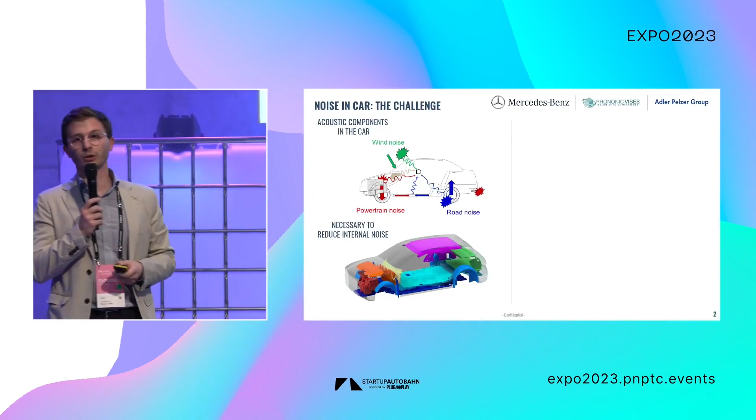So we talk to you about meta design. Meta design is, as written there, the next level of acoustic performance in the car industry. What do we mean by that? Of course, noise is an issue that exists in the car, and normally you have different sources, and different parts that address this noise.

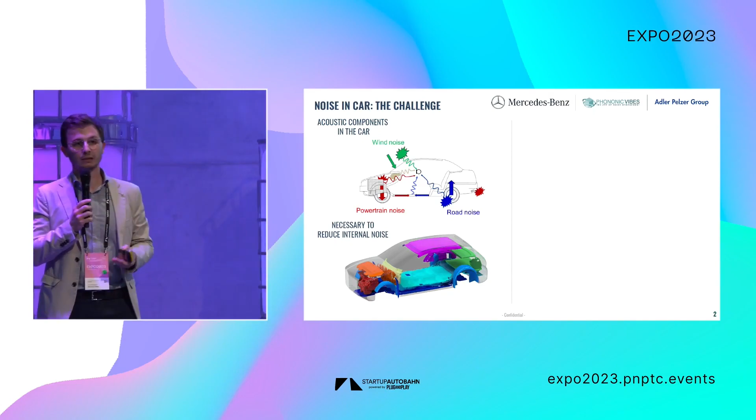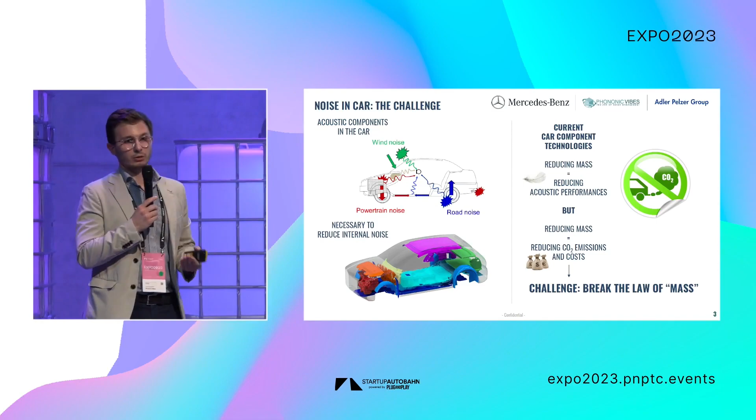Some of these parts we touch, like the carpet, for example, with our feet, but there are others hidden inside. Normally, how it works is that you have some materials, and in order to have the car efficient and to save and go for less CO2 emission, you need to reduce the mass of these components. But if you reduce the mass, what happens is that you also reduce the performance.

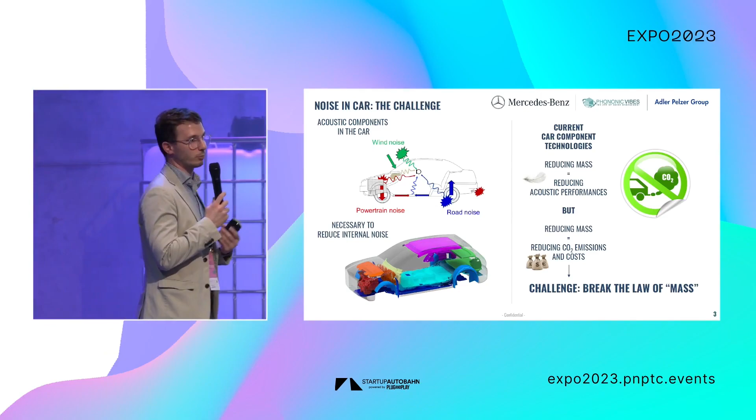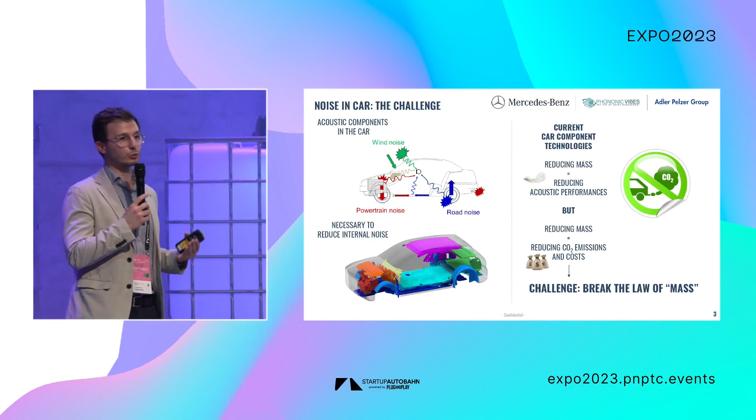So our challenge in this project was to be able to reduce the mass and at the same time have the same acoustic performance, and therefore to break what is well known in physics as the mass law. We did this with our technology, which is metamaterials. Meta means beyond in Greek, so we go beyond, which means that we work with shapes and not with the raw material itself.

You can see there some strange 3D printed stuff. You can imagine when we started the project how strange it was, these blocks in the car. But then we industrialized it.

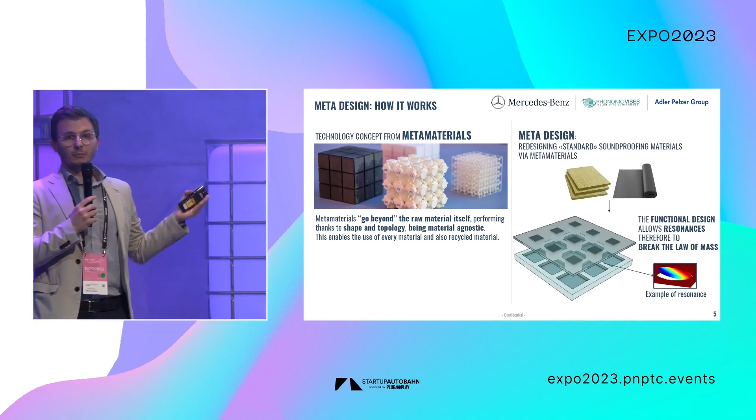The core technology is that there are some resonances. You can see that there is a periodic pattern in 3 dimensions that takes the wave and scatters it somehow. So it's everything about the shape and the topology, not about the material itself—we can use whatever material. So we combine the already existing material in the car industry and give it some additional resonances.

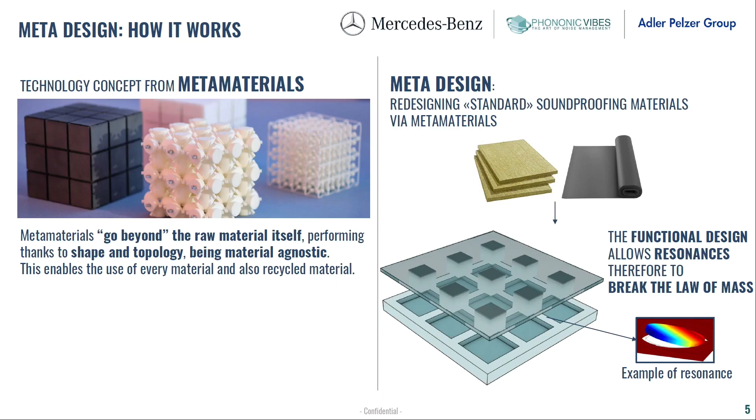At this moment, for example, a carpet is 2 layers, and if you want to improve the performance, either you add mass or you add thickness. What we did was use the surface—adding multiple resonances in the surface that give a 3D effect, and this 3D effect enhances the behavior. You can see some resonances there, but basically you can imagine a 3D moving, wavy carpet now.

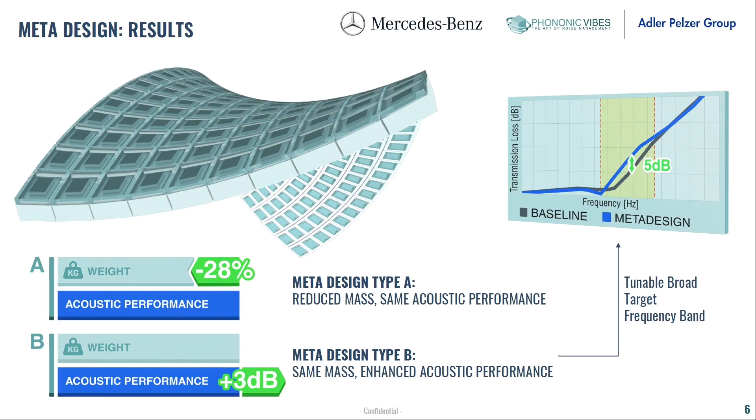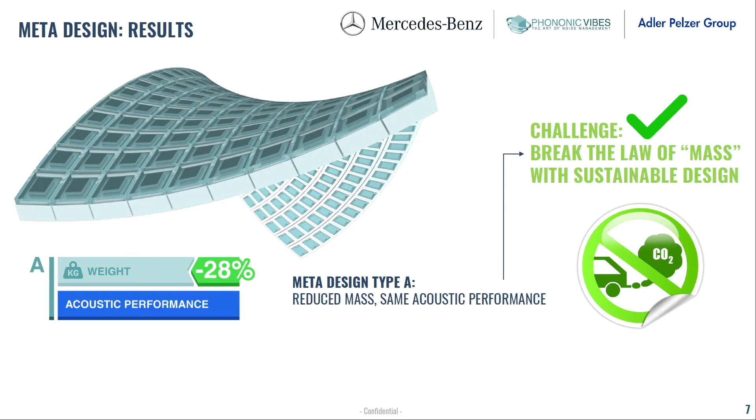Our achievement was to be able to reduce almost 28% of the weight of the structure while keeping the same acoustic performance. Or, as an alternative, we can keep the same weight but improve the acoustic performance. So at the end of the day, we were able to break, in this application, the mass law. Of course, it's not only about the planar samples or proof of concept, but also a real application in the car.

So I introduce Maurizio Torello. I give you the pointer, and yeah.

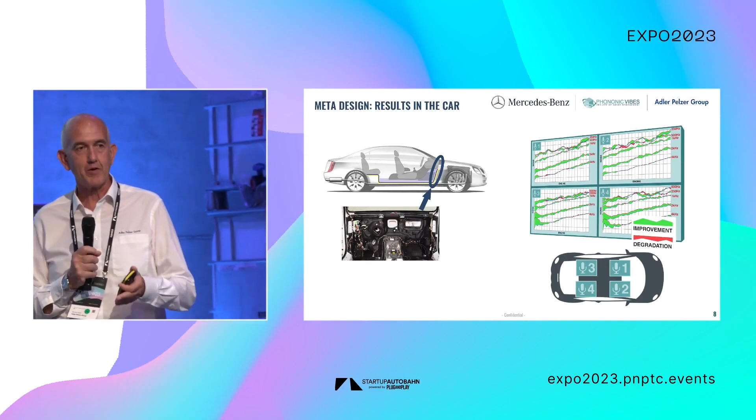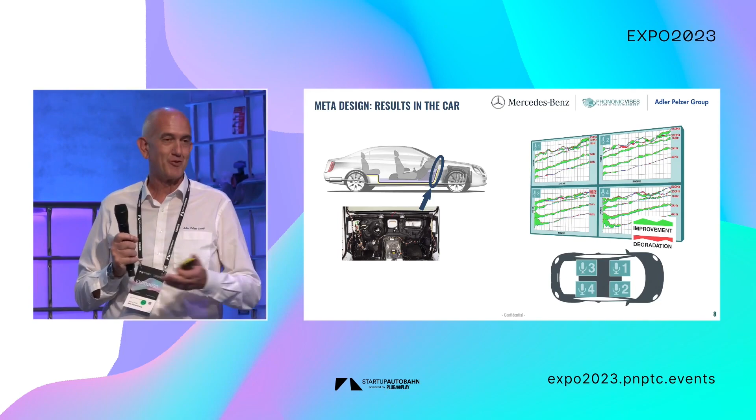Good afternoon to everybody, my name is Maurizio Torello. I'm the Global Acoustic Director for Adler Pelzer Group. Adler Pelzer Group is a Tier 1 global supplier—we do engineering, development, and manufacturing of acoustic components for most OEMs in the world. In this very important and challenging project together with Mercedes and Phononic, it was really about transferring an innovative scientific solution into an industrial vision.

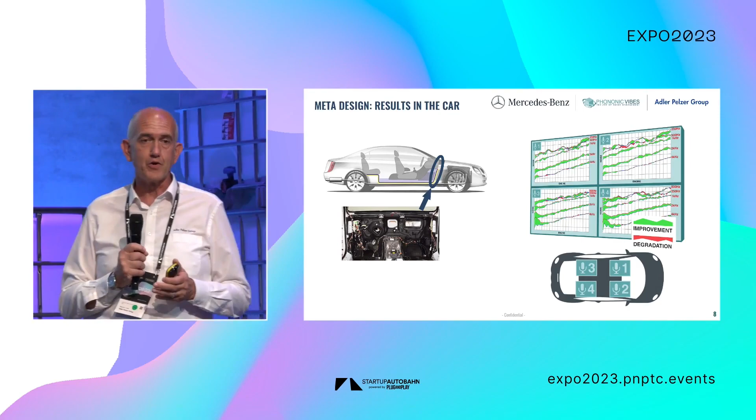That is very often not easy because, of course, you also need to have the right technology available to speed up the innovation. Otherwise, the risk is to be too late in the market. To do this, of course, we have internal capabilities, acoustic laboratories. We have different laboratories around the world, and we have acoustic competence, and of course, with the help

of the advanced mathematics, we were able to support the development activity through different phases, starting from the material characterization, because, of course, with these scientific concepts it's important to have good knowledge of the material, and that was really helpful to support Phononic Vibes and do the simulation approach.

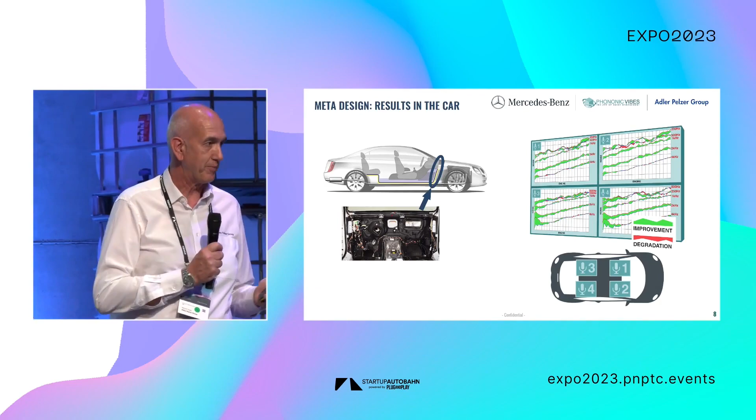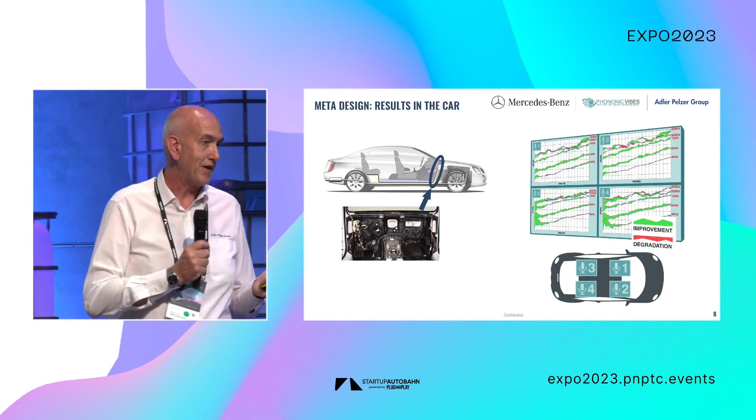Next, we approached the realization of flat sample prototype parts that are built up by two layers. One is a heavy layer or a hard layer material, impervious material. We apply a certain functionalization according to the simulation results obtained, just using metal washers. You have maybe seen some samples at our desk. And we did some experimental tests to validate the model on the flat sample area.

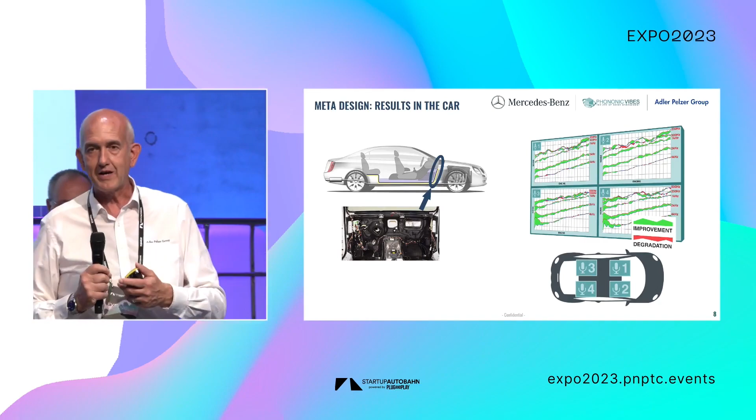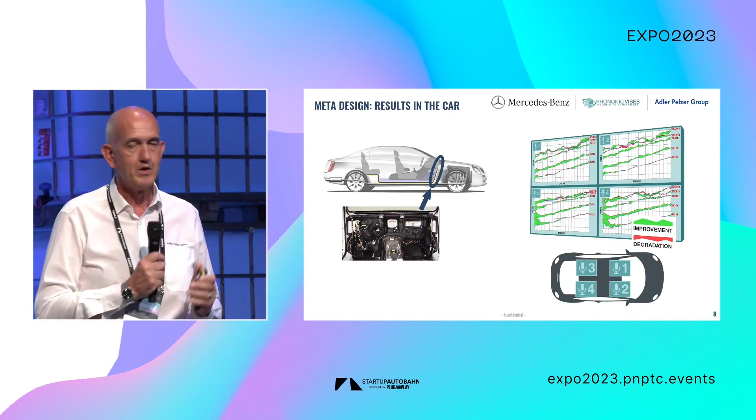The next phase was really important to check the contribution of the 3D part. We agreed to hand-make a current production part already in production. We did the functionalization first, again by hand, on both sides: on the foam side with air cavity, and again with metal plate on the A side. And after that, we again did transmission loss tests in coupled chambers on the body-in-white frame, to check statically how the behavior was.

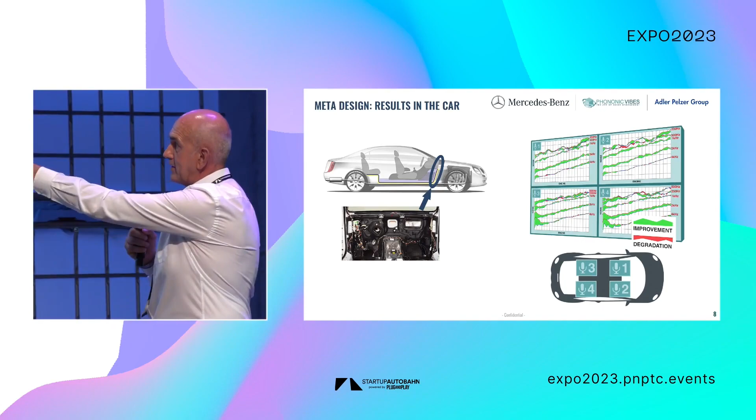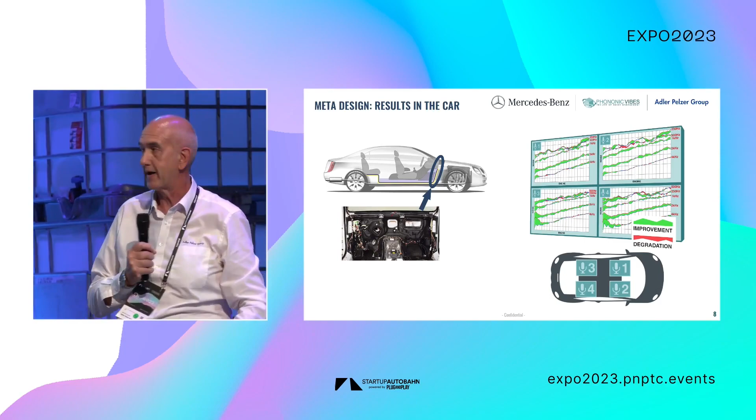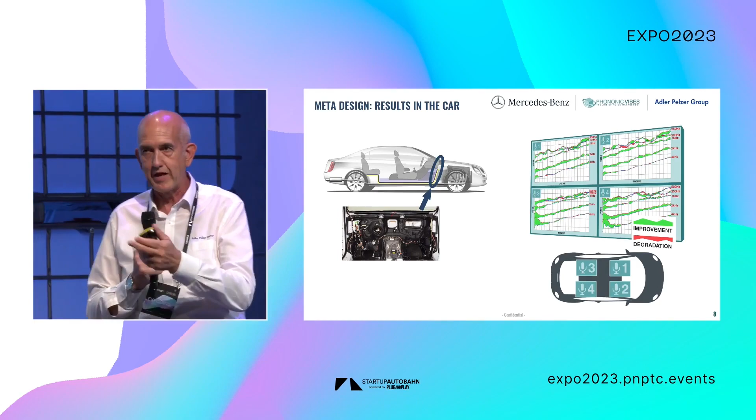Next, everything was installed in the car to do real measurements. The part that we functionalized is that one. You can see that it is the firewall inner dash, so it's the vertical component between the engine bay and the passenger compartment. And here you can see that we equipped the car with several microphones, at the ear of driver and passenger, plus other microphones located on the floor, on the tunnel area. And we analyzed the contribution.

In the chart, you can see the gap, the improvement in the octave bands that we analyzed, according to the solution that we set by the simulation.

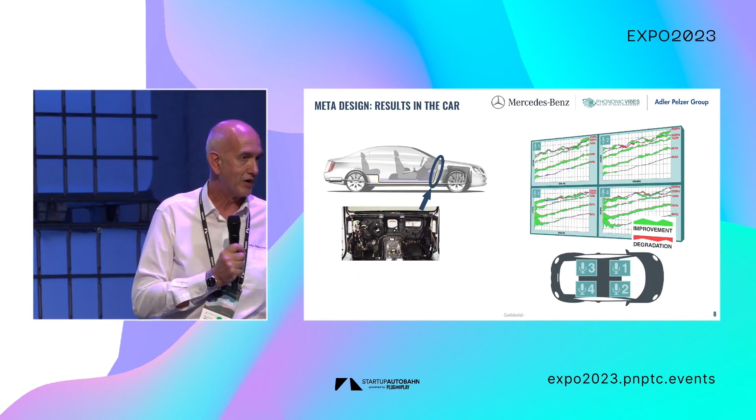Thank you so much. So, thank you, Maurizio.

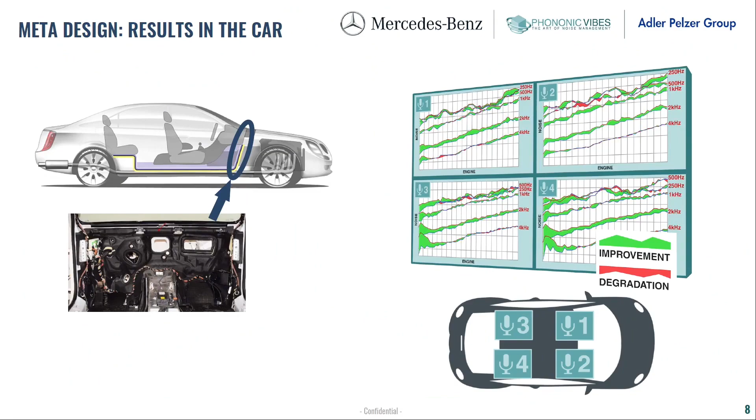And the other reason was, from day one we did a three-sided project, which means we as an OEM, you could compare us to a tanker, and with a speedboat, which you can take Phononic Vibes as a startup, we needed something in between. And that was a perfect fit with Adler Pelzer as a tier one.

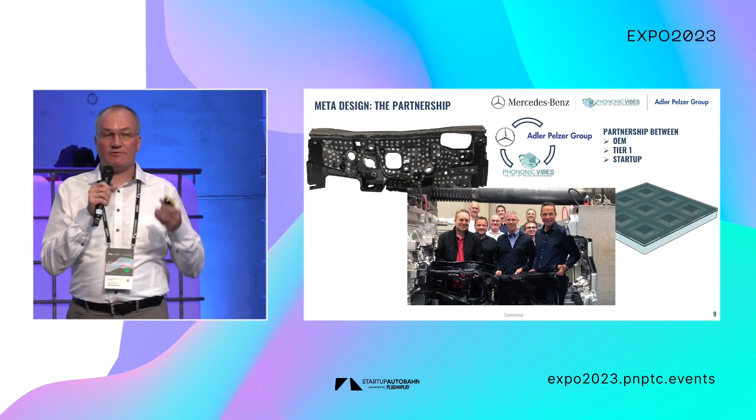And Adler Pelzer not only had the function of just producing it, but they brought in some proprietary manufacturing technologies for actually producing this. Because here we're not talking about a POC, we're not talking about "we could", but we are talking about serial production. And next year we will produce this in serial production. And it really works, and therefore it's great. And it only works because we had this three-sided project.

And we at Mercedes already have very good experience with these three-party projects where we bring in a startup as agile with a lot of know-how, us, of course, as an OEM, but very, very important, a tier one, which speaks our language with regards to production, quality checks, certifications, and all this. So therefore, it's very important to not only have a startup, but also an innovative tier one, and of course, somebody who sells it as an OEM.

So, as a conclusion, you need something like three project partners to be successful, have a great team, and of course, also have such a great platform as Startup Autobahn to really make it successful, and in the end, bring it into the car, bring it to the customer as a success.